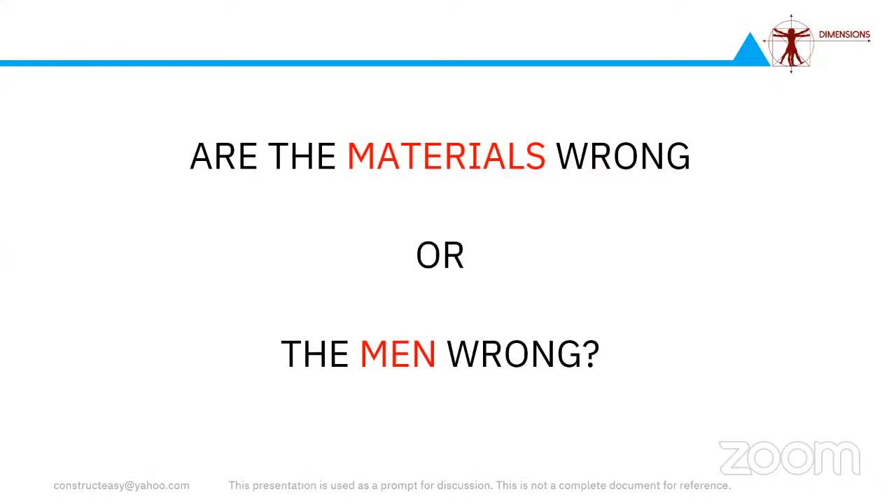But when you really ask, are the materials wrong or the men wrong? It is always the men, because you have put in the wrong material. It was our prerogative whether to choose that material or not. We were not careful enough in choosing the materials, or not vigilant enough in inspecting them, and that is probably why these defects came up. So our attitude should be providing solutions, not answers. Unfortunately, me included, most people in the industry start giving answers when confronted with a situation. Rather, we should all be focused on solutions.

Just to keep your moods high, because we are just after lunch, I thought I should share some answers I picked up from an answer sheet, and in some way we are also giving such excuses to our clients. For example, the answer sheet to your left: expand (a + b)^n. The guy started expanding it literally. There is some analogy with what we do on sites. I'm not pointing fingers, but everybody knows there is something wrong with the attitude of the industry itself.

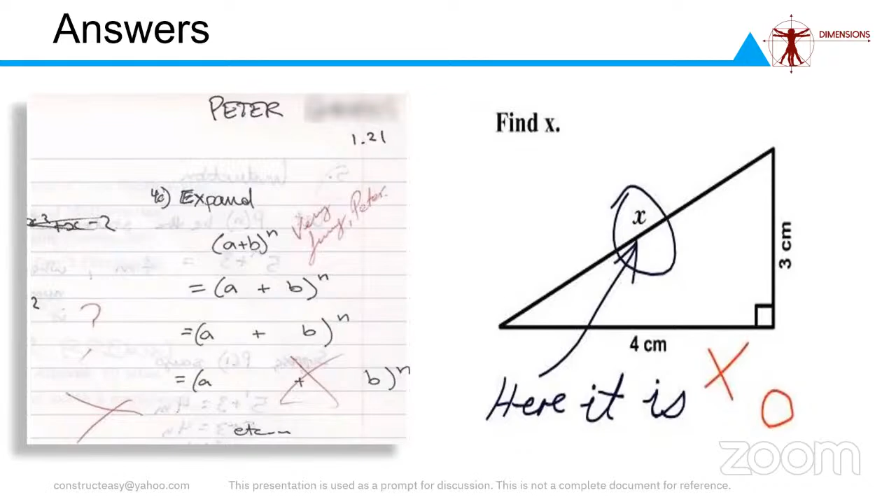So we only give what we know. We don't take an extra effort to customize the solution for the end user. So these are two examples. Maybe you can laugh looking at it, but yes, this sort of attitude is present. Either we are in that attitude, or sometimes in this attitude.

This is a newspaper cutting I took from a newspaper in Kerala. The rule book in Kerala once said that the pillion rider, the person sitting at the back, need not wear a helmet. But if you look at this picture, he has followed the rule, but not kept the spirit of the rule. And this is a very unfortunate attitude we have as constructors or designers. We go strictly by the rule book, without cognizance of the overall situation at the site.

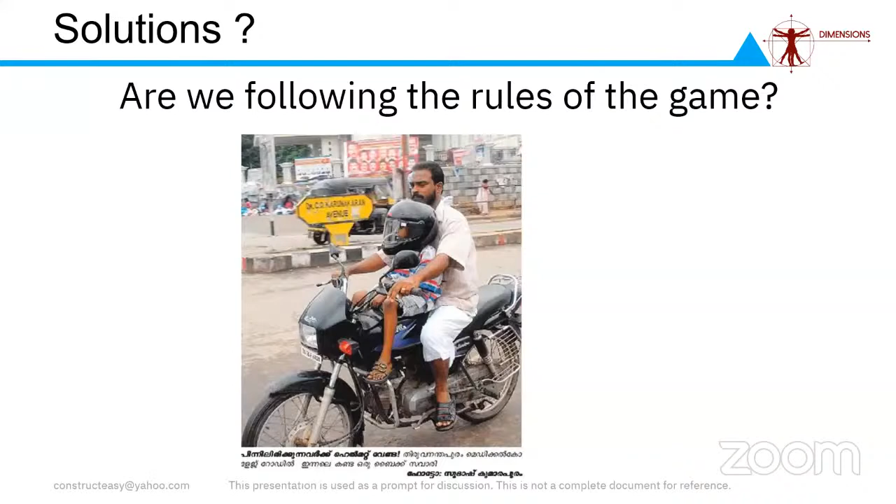We never relate it to the holistic situation at the site. So we tend to get too much into the rule and end up giving wrong results. These are generic examples, but I will slowly go into very specific examples of the construction process itself. I just want to set your thought process that yes, we have an attitude problem or a perspective problem. If we change that, a lot of defects can be avoided. So that was the moral of this story.

When we come to building materials, we commonly stumble upon sand, coarse aggregate, commonly known as metal here. There is also confusion here. Though we have technical terms for any material or process, the industry works on a very colloquial kind of language. Unless you know that colloquial language to communicate with the mason or the worker or labor level, you are not able to set the wheel in motion. This also should be changed according to me. We should all be more oriented towards the right vocabulary, even in specifying products.

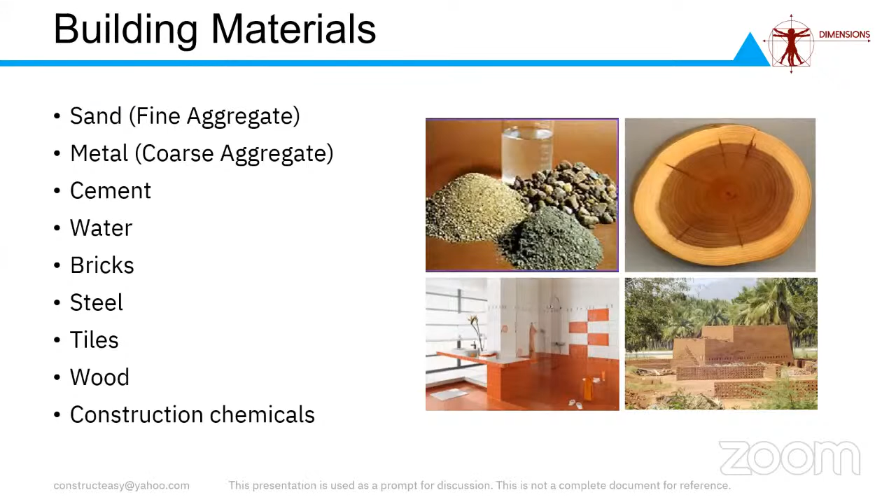So sand, coarse aggregate, cement, water, bricks, steel, tiles, wood, etc. All said and done, the basic construction materials fall into a list of not more than 10 to 15 items. We should know the specifications, the right kind of parameters for that particular construction item to be accepted. What I'm trying to underline is we should all be aware of the acceptance criteria for each building material we are going to use, and all these acceptance criteria are well defined in our codes, Indian codes.

We only have to sensitize ourselves to those values and start rejecting the non-compliant materials... only when we have a culture of rejecting non-compliant materials do we get the vendors sensitized to it, and they start giving us the right materials. As long as you keep accepting the defective materials, the vendors will also keep supplying you defective materials. I have at least experienced this in many of the sites where we execute.

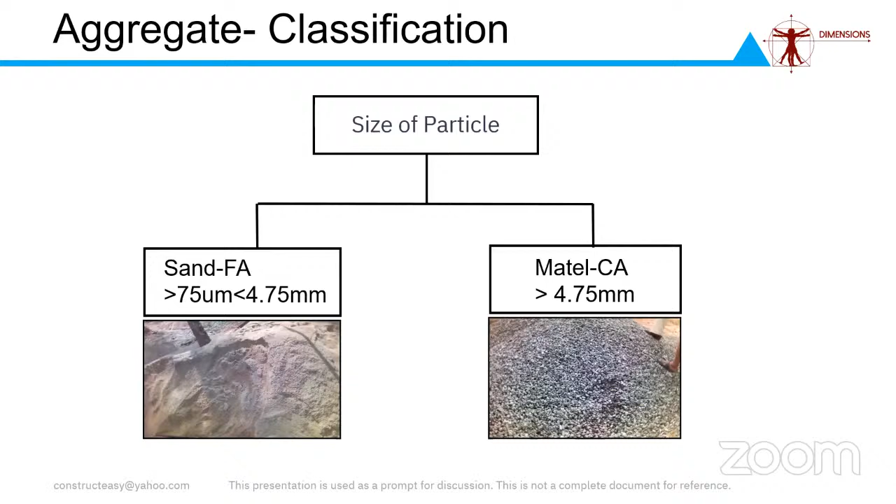For example, aggregates, if it is very flaky or elongated, we don't take that, we don't accept that. So once or twice, we reject the supplier, we reject the load, then the supplier comes in line and starts giving us very good quality material. So please be sensitized to it.

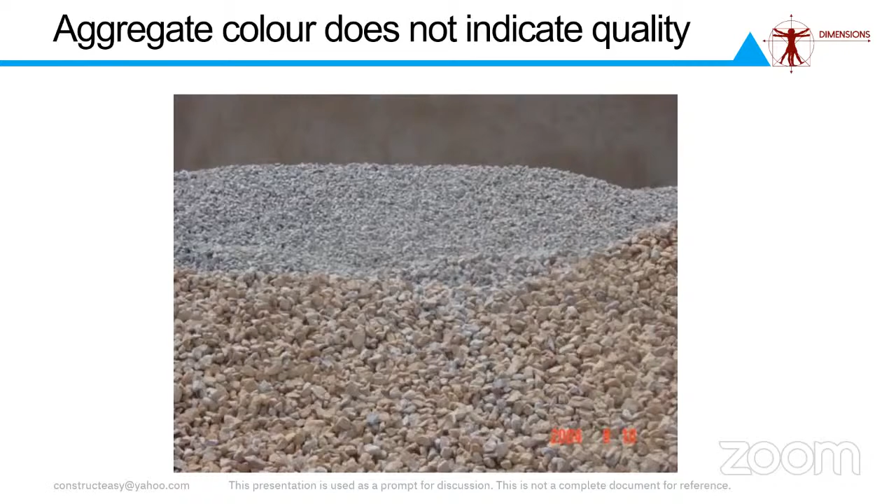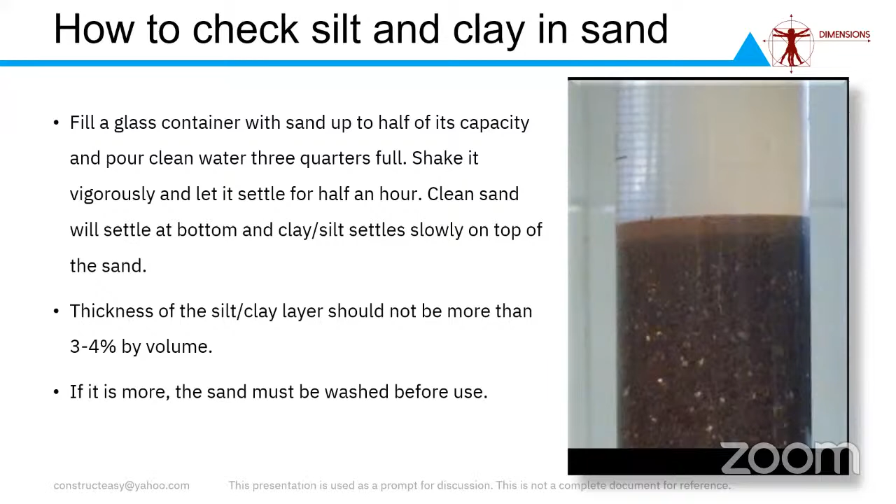I am skipping all these mundane items like how to check clay in sand, all these things. I have 2-3 PPTs to skip, I mean to switch. So I'm just skipping these mundane items, but nevertheless you should be sensitized that there are very simple tests available at the site. For example, to test clay in sand, you can just use a measuring jar or a PET bottle even at site to find out whether the sand supplied to you is silty or having excessive clay, whatever. So there are very simple techniques at site to find out the quality of the raw materials supplied to you.

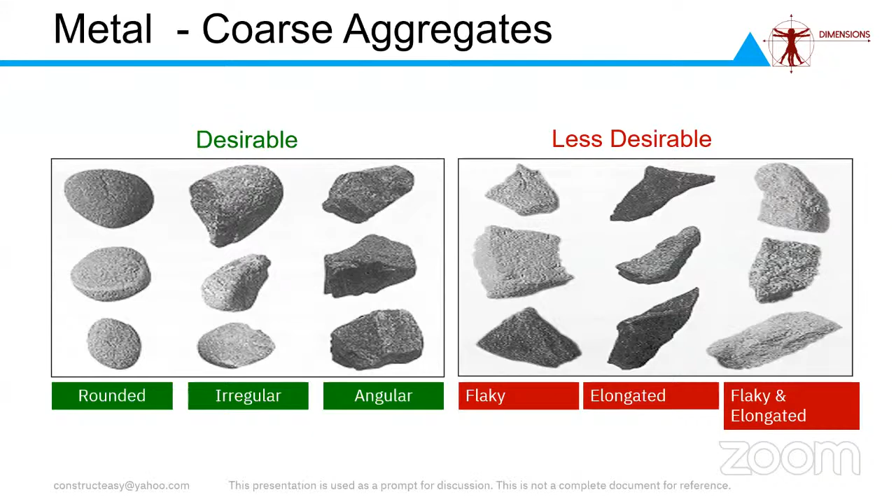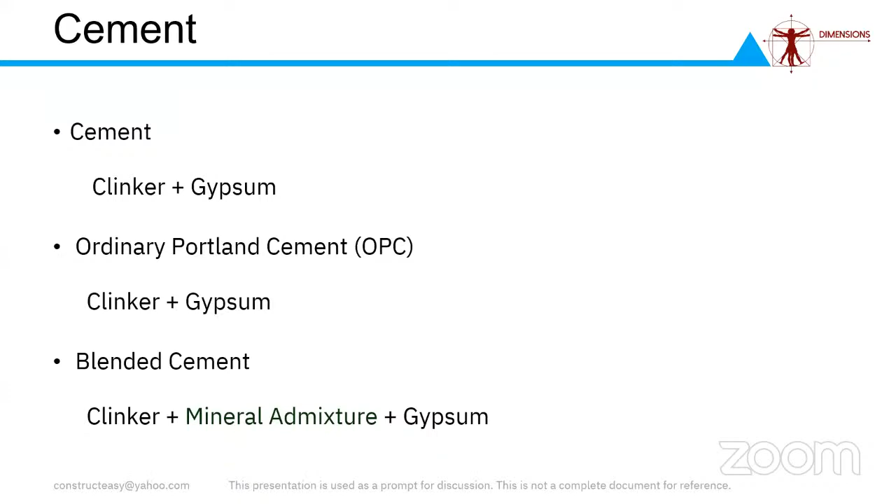So I will not elaborate on this too much because these are all mundane things which your textbooks have already given you, for sand, coarse aggregate, fine aggregate, cement, all this stuff. So I will straight away go to the defects.

Any one participant? Anyone? I'm just doing this to make sure that I am online with you because I am not seeing my face or anybody's face. I'm just glaring at this PPT only. Amrita? Bangalore. Amrita is there? Arpita? Abhilash? Please, don't take it as a viva voce kind of a situation. We are just discussing, and we are only going to spend the next 40-50 minutes very usefully for both of us. Yeah. Anyone come voluntarily?

No one is there, I think. Okay, so I'll keep the ball in motion, sir.

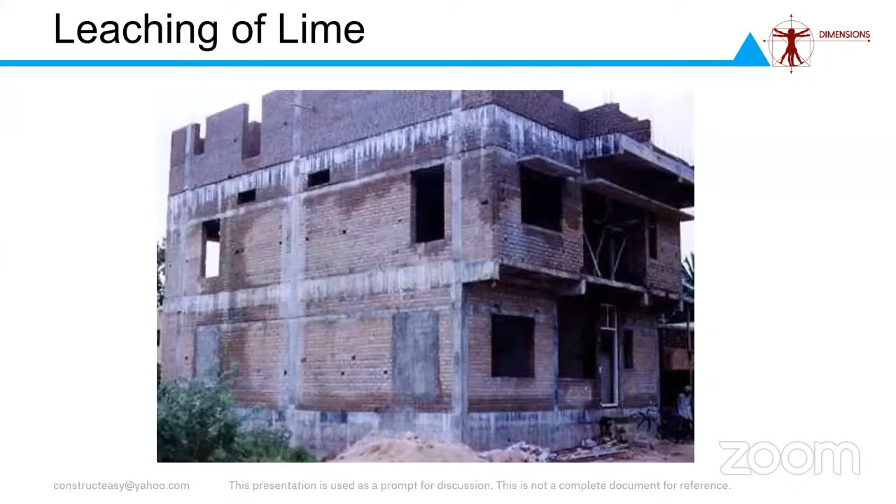Now these are pockets where moisture can attack and thereby accelerate the corrosion process of your steel. So it's a very common defect that is taken very lightly.

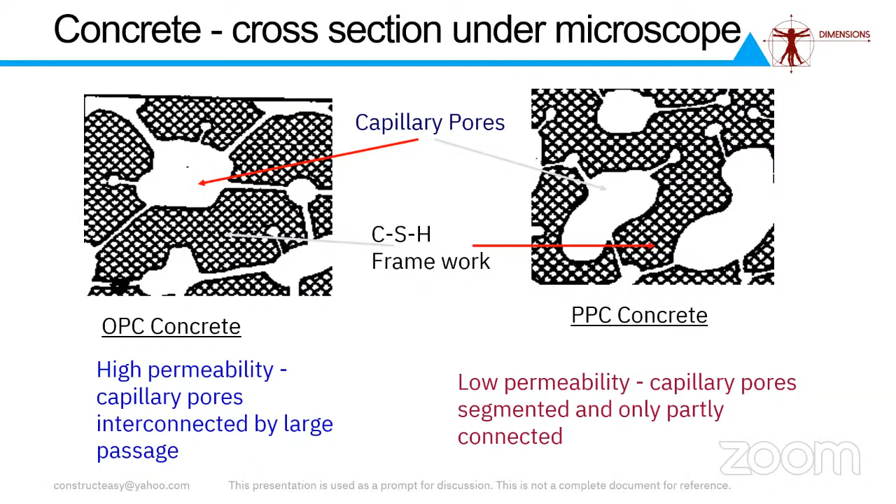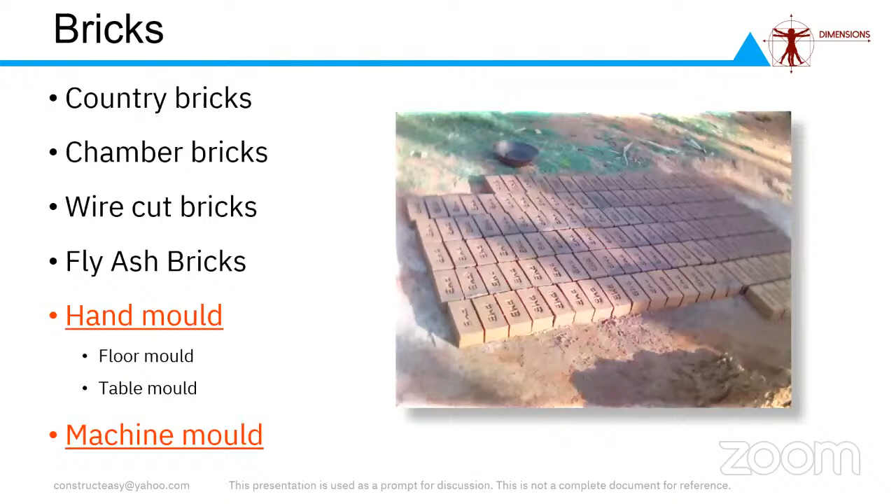I just told you these points of pore refinement, how cement chemistry can help you in controlling the leaching problem. So I'm skipping the mundane parts.

Now coming to very important defects in a building: a building is subject to a lot of external harassment, I would say, by the rising dampness from the floor, attack by nitrogen oxide, sulfur oxide, carbon dioxide, the pollutants in the atmosphere. The rain itself is classified as acid rain because of pollution levels in the atmosphere—whatever we get is more or less acidic rain only. So these are all external loads or attacking factors on a building, against which your building has to fight and still be defect free.

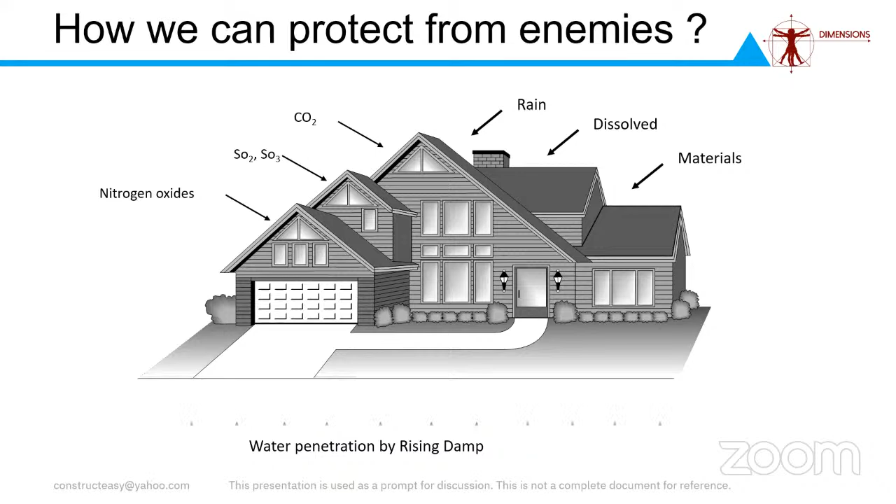There are other factors such as overloading, under design, wrong execution, wrong selection of building materials, which are all captured inherently in the building. Apart from these external factors, there are also internal factors which contribute to defects in a building. I'll show you this example.

This was a period when I was working for the cement company, as told in the introduction. I was working for ACC Cements, and I saw this pleasant sight of our cement being used at a site. I saw these bags with our company logo and all those things. I was so happy, so I entered the site and congratulated the owner.

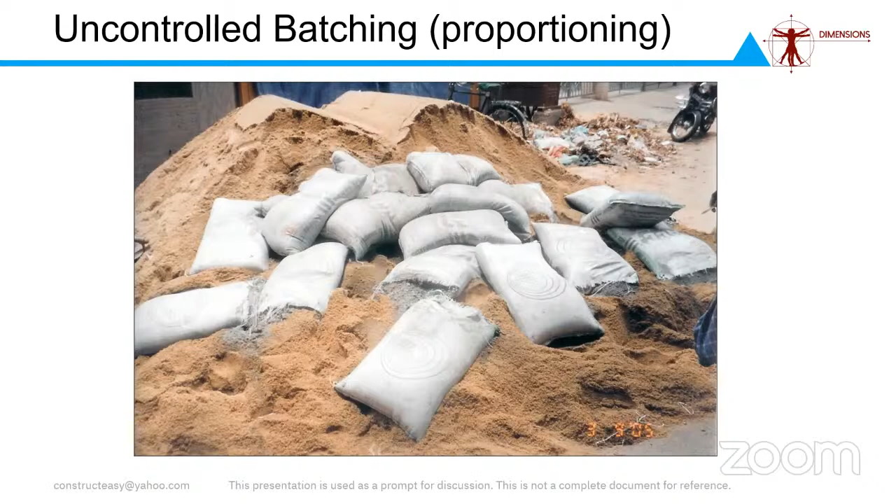But I found something shocking - they just tore a few bags, put it on a pile of sand, and started mixing it. They had aggregates separately. I think you'll be able to see it in the background. Are you able to see my cursor moving?

Yeah, so there were aggregates. They started mixing these aggregates with this mixture of sand and cement, and started concreting. I got shocked because the process of batching was completely ignored. When I questioned the contractor, he said, 'Sir, I know how much sand I have procured, and I am doing batching internally. I don't worry, overall the ratio is good.' But batching is not about ensuring the overall consumption of materials - batching is to be done for every cubic foot or every cc of the concrete you pour. So the uniformity of proportion is gone.

It was my duty to sensitize the owner that this is a very wrong construction practice. But unfortunately, this is a regional practice in many parts of South India - at least I've traveled extensively in South India than North India, but there are many pockets, many regions where this is the practice. There we still have primitive technologies to batch concrete, but this should be avoided. We should at least use a farma box, or volume batching by pans. That itself is wrong, but still in an advanced era of ready-mix concrete, we are still in the primitive stage of allowing site mix concrete without a process of batching.

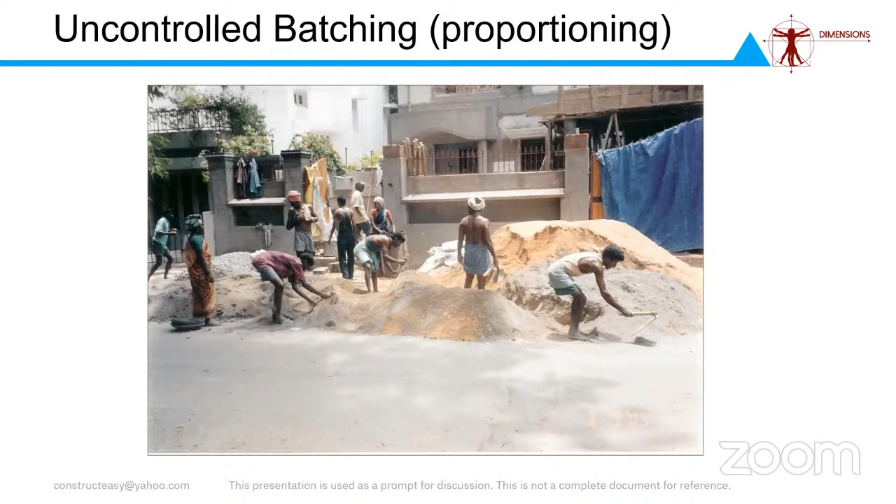Then I went upstairs, and to my shock, I saw something in a pan. I think you can also see this clay mixed with water kept on the roof. I asked, 'What is this for?' They said wherever we are providing joints for the electrical conduits, we put a lump of soil on top of it, and wherever we are providing hooks for the fans or the swings, we put a lump of this clay on the shuttering sheet, and then pour concrete on top of it.

I remember on one side we were advocating - if you remember your school days or college days when you studied construction materials - one cardinal rule of sand: it should be well graded and free from clay. Having defined that as a very cardinal principle of selection of fine aggregate, we ourselves have allowed this habit of introducing clay inside the concrete. So these are some wrong practices which are still prevalent.

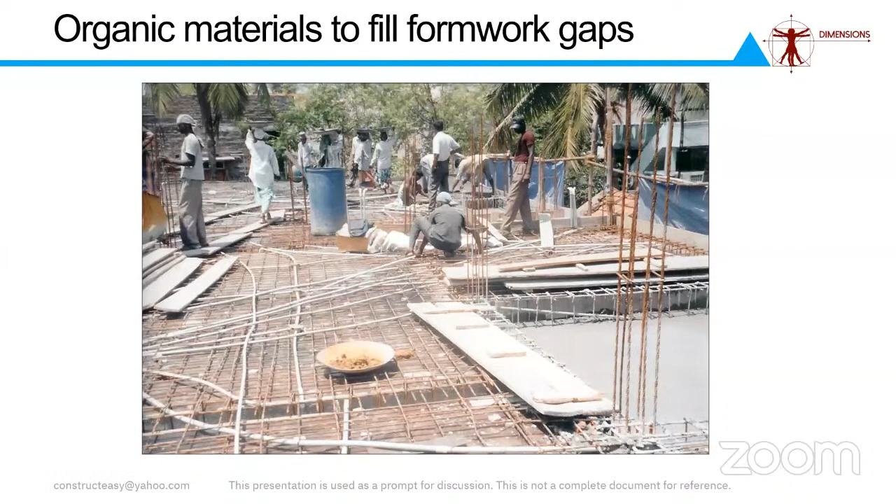And finally, we end up with dampness in concrete slabs and unpacked fan hook points. What happens after the formwork is removed? You still have the clay lump visible. We use a knife or a small steel rod to clean it up, and nobody cleans it with a jet of water or anything like that. So it is improperly cleaned and improperly sealed again with patching concrete. Now this clay which is inside will swell after a certain amount of time, and that concrete starts spalling or cracking. This is one famous photograph which I've shown to at least 200 of my fellow engineers practicing in and around my region.

Everybody said things are perfect - this is the kind of consistency you have to mix concrete. They are mixing, and sooner or later they will be leveling it. So I think this is the perfect way to concrete. In fact, colloquially, people told me - when I was migrating from the stage of a student to a site engineer, I remember my contractor telling me an analogy, saying that concrete should look like, or you should feel concrete like curd rice. That should be the consistency. He actually meant to say the cohesiveness of the concrete.

But all those are fine. Many people fail to notice this bleeding water. If you can see the footprint - I think Krishnamurthy sir is also watching this picture, he will be annoyed seeing people working with slippers, the safety boots are not there. But leaving that topic aside and concentrating on the material, the point where I am circling now with my cursor, you can see a footprint here, and you see a lot of free water here.

This is bleeding water, which is a clear indication that there is excessive water cement ratio in your concrete. So excessive water cement ratio means low strength and low durability. This is the basic Abraham's law. So this part nobody is sensitized to, and this is a major cause for defects. Defects like what? Defects like this.

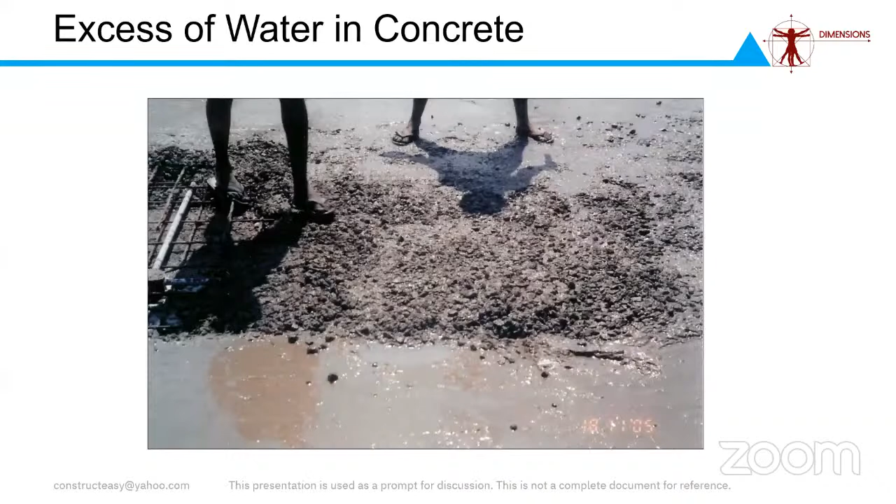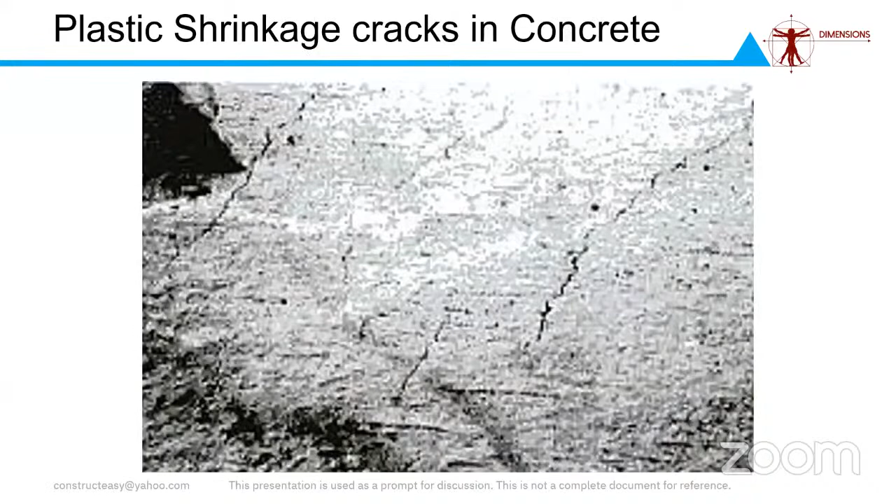The classic plastic shrinkage crack is either due to too much of fines in the concrete, or due to excessive water cement ratio. As a result, the water starts evaporating too quickly, and it results in the shrinkage cracks. So if you control the water cement ratio, you almost control the cracks. So that is the moral of the story.

If you can see here, even on this site, they are at least using a batching technique. But before the cement bag reaches the mixer machine, at least 2 to 3 kg of cement is lost. Now, where is the question of your mix design? Where is the question of minimum cement content being ensured in the designed mix? So these are some of the carelessness which we do in creating the real concrete.

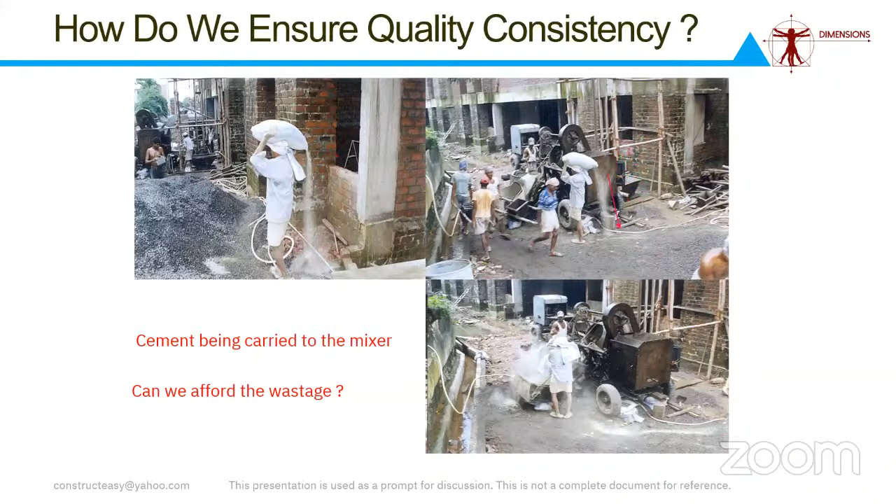On papers, everything looks good, but when it comes to actual execution, you can look at the coarse aggregate just haphazardly spread, and this will also be used for concreting along with the soil. So there is no proper storage system, no proper batching system. There are no proper check measures to find out whether your actual design has actually been executed.

This is poor site management, poor landscape management at the site, where rainwater, or in most of the cases in cities, we are forced to pour concrete along with sewage water also. Now these are all ignored or swept under the carpet. But when it later erupts as a problem, then nobody is there to pinpoint that these were the reasons for the defects, because everything is forgotten. Nobody has a record of what happened in the site when it was actually made, and therefore we are left clueless on how to treat the problem.

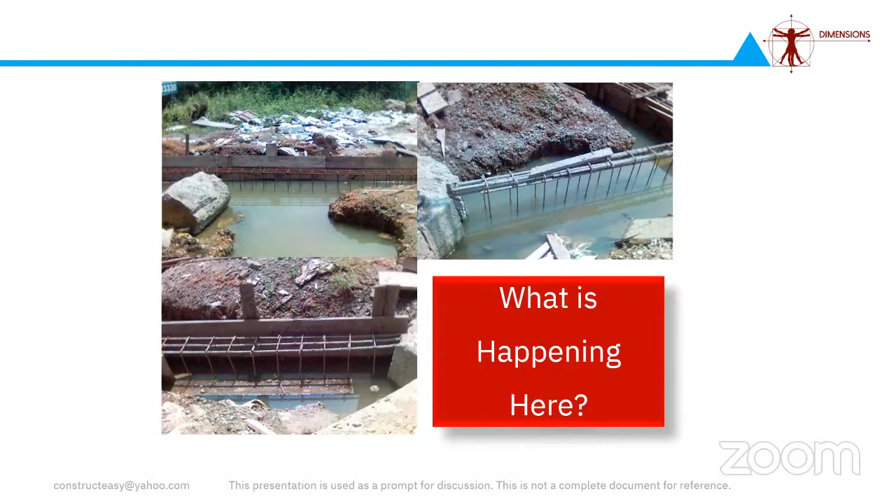So sometimes when it comes to a repair and rehabilitation project, when we go there, we find all the defects all right, but we never have a clue of how it could have happened. Maybe presently the source is not there, but when the construction was made, there was a pollutant or a source of this potential defect, which nobody noticed, and that is where we all fail.

So I would appeal to the engineers community that apart from the procedures what we teach in the design or in the quality control in production, we should also be having a checklist which clearly defines the prerequisite for each item of work which we are going to execute at site, or at least there should be a mechanism to record the scenario in which that particular item was made.

Now, this also is a very accepted phenomenon nowadays. Whenever you are doing a lath work or a ferrocement work, by not providing enough cover or a proper cover for the reinforcement, the steel reinforcement starts corroding, and you are getting all sorts of these unsightly pictures and the cracks. That is one reason. The cover thickness for the reinforcement is very conveniently ignored. People use very cheap cover blocks, not properly dimensioned. Many places they still use coarse aggregates as cover blocks. This is one reason.

On the other side, people don't understand corrosion very holistically. People have confusion with the normal rusting which happens. The steel, once you procure it, comes in a steel gray color, but when you leave it at site for 3-4 days, it turns into an orangey or brownish color. It is due to the oxidation of the steel. It forms ferrous oxide and it forms a coating on the surface. This is not bad. You can just clean it and still use it. But corrosion is different. This is not an oxidation reaction. Corrosion is an electrochemical reaction.

So when the same member, the steel, is subject to two different environments, like of different pH, one part becomes cathodic, the other part becomes anodic. So this is the simulation of a typical electrolytic cell, where you have an anode, a cathode, and an electrolyte. This electrolyte is also simulated in a concrete system where the pore moisture acts as the electrolyte. You have one portion which is acting anodic and another portion which is acting cathodic. Why should this act as anodic and cathodic at different regions? It is either because it is embedded in a concrete with different pH.

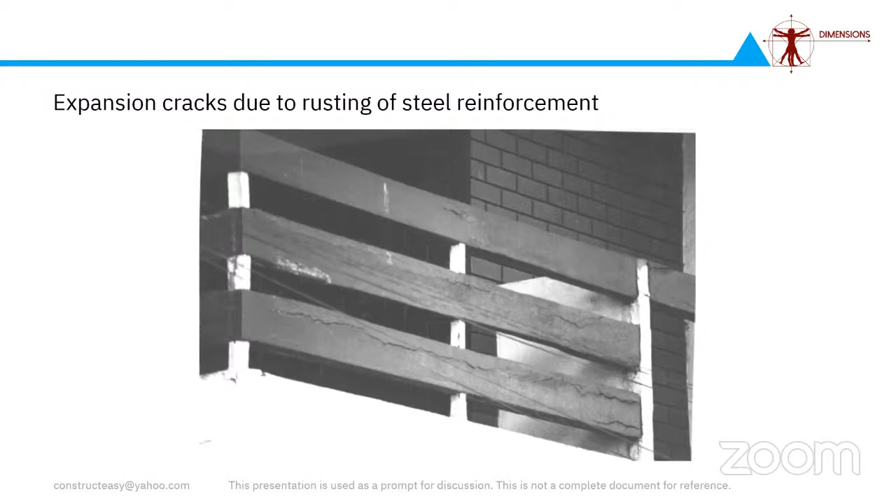It is not only okay to maintain the prismatic nature of the member, but it is also very important to maintain the material quality of the member also to be very uniform, because your steel is so sensitive to pH. So different pH in different regions will simulate an electrochemical reaction, and therefore the corrosion will become faster. This is one reason. The another reason is bimetal corrosion. If we start mixing two different grades of steel in the same system, then also this corrosion could happen.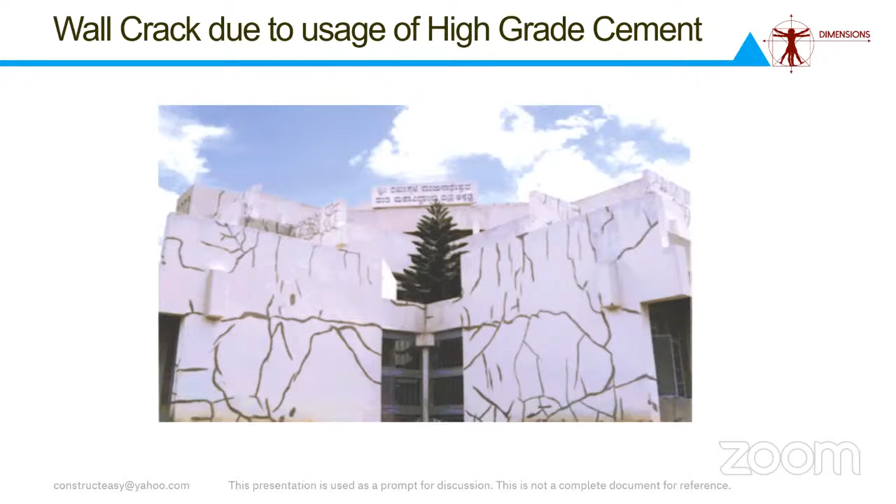So maybe as we do our master health checkup when we touch 40, we are sensitized enough in doing a master health checkup. Similarly, for buildings also, we should have some advisory which will recommend a master health checkup or a structural audit to maintain its stability and integrity. So we'll move to the next example. Now this is the same defect. This is one defect which again people have started accepting. This is called as a crazing crack.

Sometimes these are not even visible to the naked eye. Only once you pour some water on the surface will you understand this crazing crack. This is basically arising out of improper curing. People think that we have to cure concrete only the next day after the structure is done. It is wrong. You have to start curing as early as possible.

When I say this, I think you should also understand what curing is. Curing is not supplying water to the concrete. Curing is prevention of escape of water from the concrete. That is curing. Say, for example, you have a technology in which you can seal the entire surface. If you can laminate the entire concrete surface with a waxy layer or a plastic layer, then you need not do curing, because the curing is already done.

The water which you have added during the production of concrete itself is still there and it is not allowed to escape. So this water is available for the complete hydration of cement. But if you start allowing it to escape into the atmosphere, either by wind or by sunlight or by the external temperature or the humidity, then this crazing crack happens.

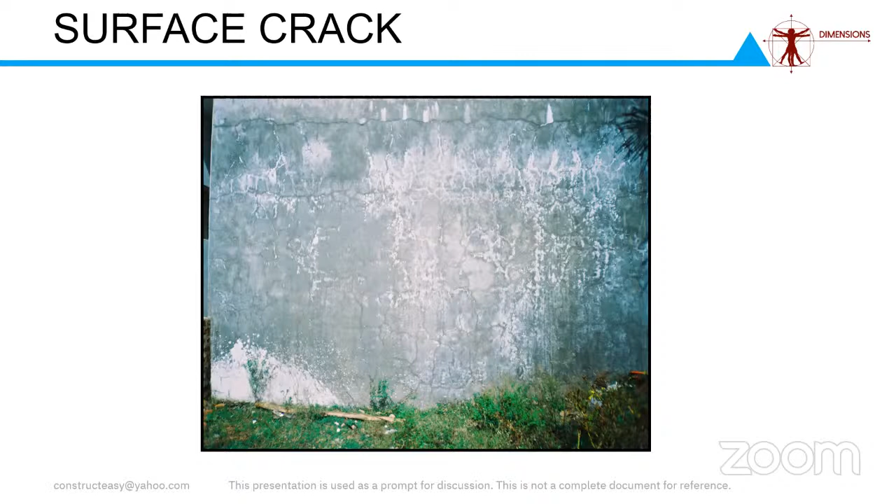This is probably why people are giving shades to the constructions. If you have noticed villas and small constructions around your area, they are covered with a cloth or a pandal, whatever you call it, to provide shading to the building so that there is no rapid evaporation of water. Curing is very effective. So early curing is the solution for the surface cracks, or the crazing cracks, as we would call them. This is another classic example.

99 out of 100 buildings done for housing units have this defect. This is because of improper cover. Either you give too much cover or you don't provide cover. There is an imbalance in the cover given, because if you start using aggregates instead of cover blocks, there is complete guarantee that all the aggregates will not be of the same size.

So somewhere it will be 18 mm, somewhere 25 mm, somewhere 16 mm, whereas the code recommends a 20 mm cover. So somewhere you have given a 10 mm cover, somewhere a 25 mm cover. There is an imbalance already. And smaller covers will spall off more easily, because once the steel starts to corrode, it tends to expand. When it dilates or expands, it will push out the cover concrete.

So in the first place, why should steel start corroding fast? It is because of the quality of water we have used during the concreting. People are not sensitized to this. We are forced to use whatever water is available at site. In many sites, especially in residential construction, we make the borewell first. We never get the water tested.

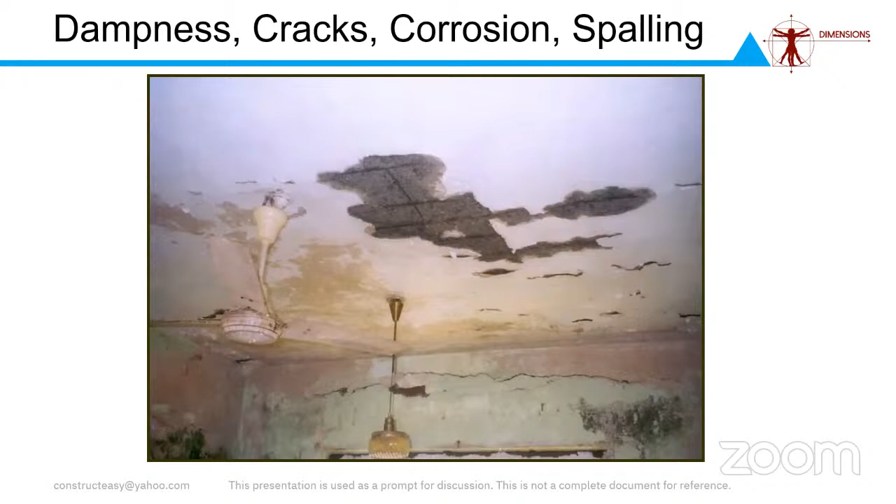This is also common, cracking in ferrocement, or the lath work, what you're calling. We have the reinforcement mesh inside this, and we just dab the concrete on top of it and finish it. Out of all the materials we use for construction, steel is the most sensitive to heat. It has, I think, the highest coefficient of thermal expansion. So what I'm trying to say is, steel tends to expand easily when heated.

And if you see, the lath work or the slabs are the elements which have the maximum steel in them. The distribution of steel is maximum either in the lath work or ferrocement work, or in the RCC slabs. And incidentally, these are the elements which receive maximum sunlight, or which are subject to maximum conductivity of heat. Therefore, the steel inside tends to move. If you don't provide enough protection to the steel in terms of the quality of concrete and the thickness of concrete around it, then it is more liable to cracking.

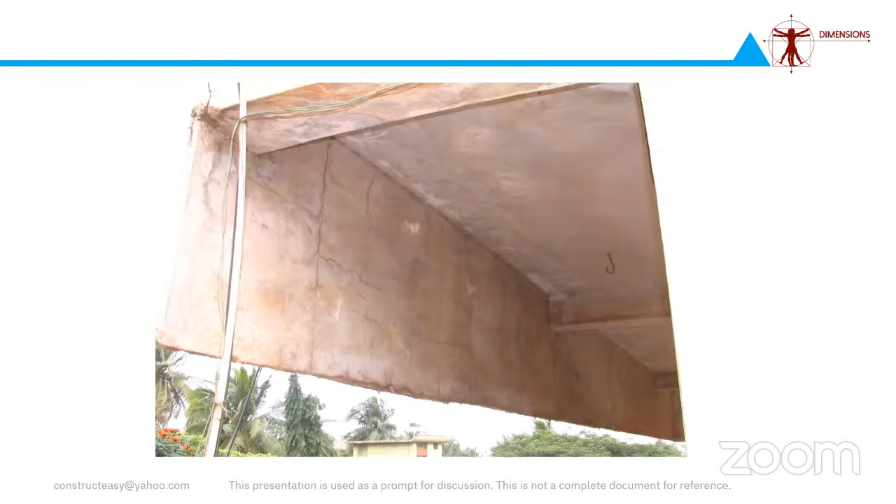So the solution for this is a proper design. Make the choice of the ideal or most optimized diameter for the steel, the quality of steel to be used, the water cement ratio of the concrete which will be used, and the thickness of the member itself.

One more example. Now this is another good example. You can see a horizontal crack here where my cursor is moving. This is probably the bottom of the roof slab. Many engineers who are sensitized to information like cover concrete use proper cover blocks. We have seen that, but even in those buildings, we observed these cracks.

If you go around your town and observe residential buildings which were done some 5 or 7 years back, in almost every building you can find the level of the roof slab, because that portion would have cracked. This is because we are not so sensitized about the side cover of the reinforcement provided for the slab. Bottom cover, everybody knows, we have the cover blocks in place, but side cover is taken for granted. The side cover is as important as the bottom cover itself. So if you take care of side cover, to a certain extent this can be avoided.

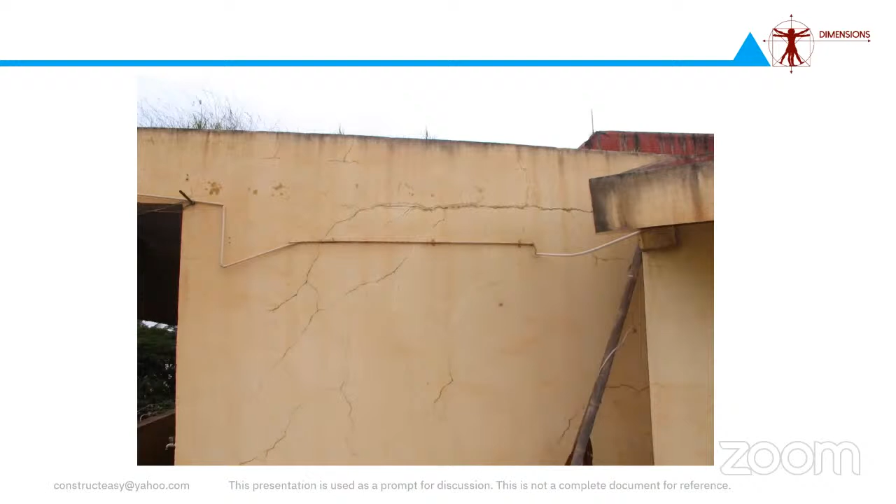And the other reason I told you: because the topmost slab will be exposed to maximum heat, steel will tend to expand, and this will try to push the slab out of the plumb line of the wall, and therefore this crack arises.

I saw one innovative practice in Kerala. If you can see this, almost all the buildings in the state of Kerala don't finish the roof slabs flush with the wall lines. They have a projection. If you can see, above the lintel they have given additional supports in order to protrude or cantilever the roof slabs outside the plumb of the wall. This is a very good practice.

This will avoid that horizontal crack, because whatever expansion happens in the slab happens at the free end, and therefore nobody notices a crack. If the slab needs to expand, it expands in the cantilever portion. If it has to contract, it contracts in the cantilever portion. If you remember your UG syllabus, you would have studied the plate problem, the Fourier series problem, the heat problem, where the expansion is maximum at the edges rather than the center of a plate. So that theory is valid here.

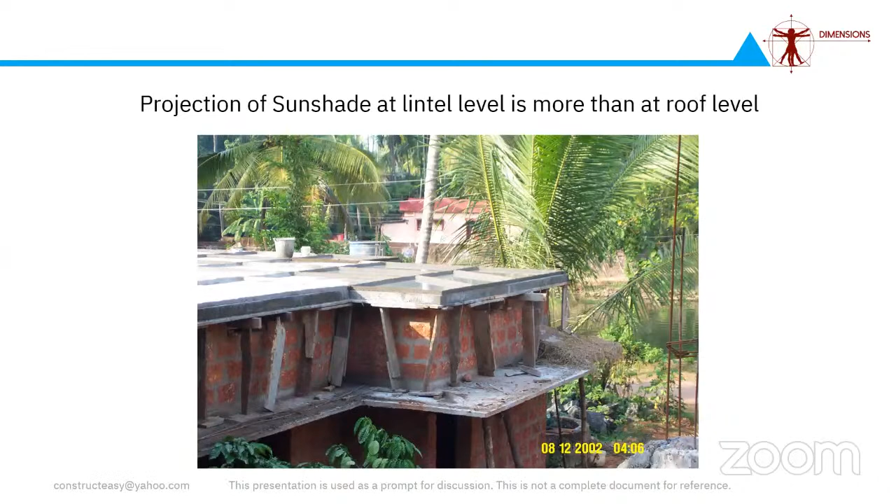That is probably why we had it in our syllabus, but unfortunately our mathematics professors did not sensitize that application to us. But this is the reason. Once it has to expand, it can expand in the cantilever portion. So this horizontal crack at the roof slab level can be easily avoided. I don't know by what means they were able to achieve it, but almost 99% of the buildings in Kerala are done in this fashion, and therefore they don't have this problem we are talking about.

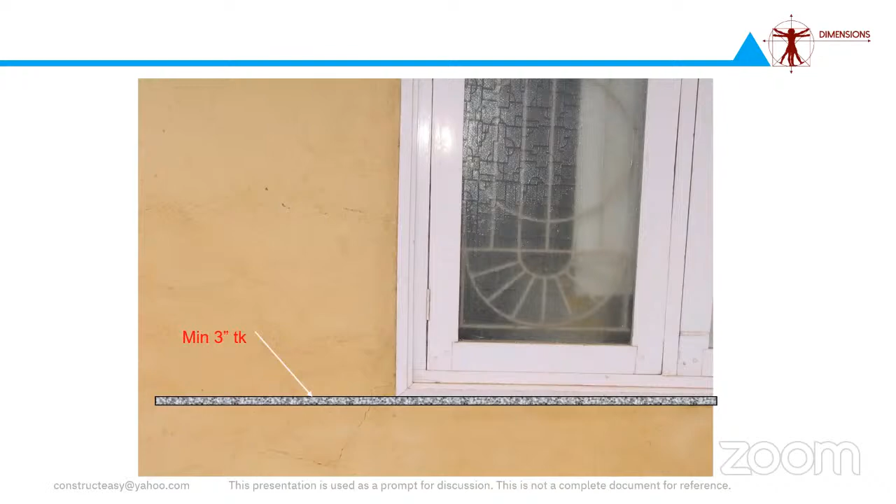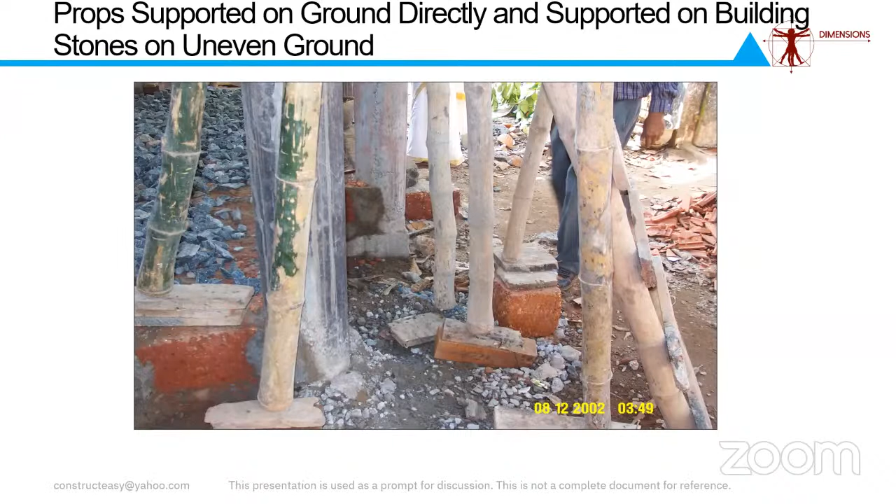And this will result in sinking of the formwork also, which may be to a tune of 2 to 3 mm or 4 to 5 mm, which you may not even realize. But this settlement of the formwork has already caused its problems inside the concrete. There is some gap created because you already have a mesh of reinforcement inside, so it will partially prevent the aggregates from sinking down along with the formwork. Therefore, there will be a void created, and this void is always a problem. Any civil engineer with common sense will be able to accept that.

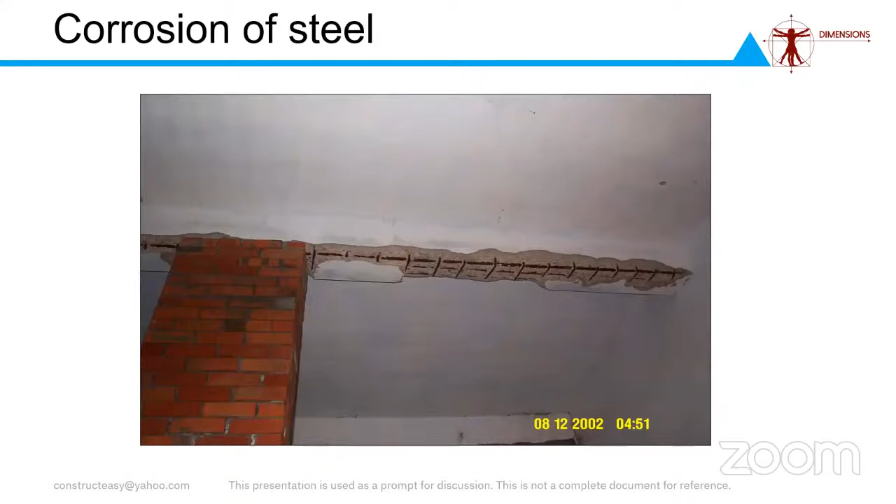And again, this is corrosion of steel, because you have been very careless in selecting the grade of steel, or you have been very careless in maintaining the uniformity of the quality of concrete along this member. So you will have anodic and cathodic areas, and the steel starts corroding faster.

Whenever you have different mediums butting each other, as an RCC column and a brick wall, we don't give enough thought to the coefficient of thermal expansion of both the materials. You don't give enough thought to the shrinkage characters of the materials, and therefore you are bound to get a crack at the junction. This can be avoided by using suitable adhesives which are available in the market now. This, to a certain extent, will withstand the tensile force which causes the cracks. You can also do the meshing around before you do the plaster.

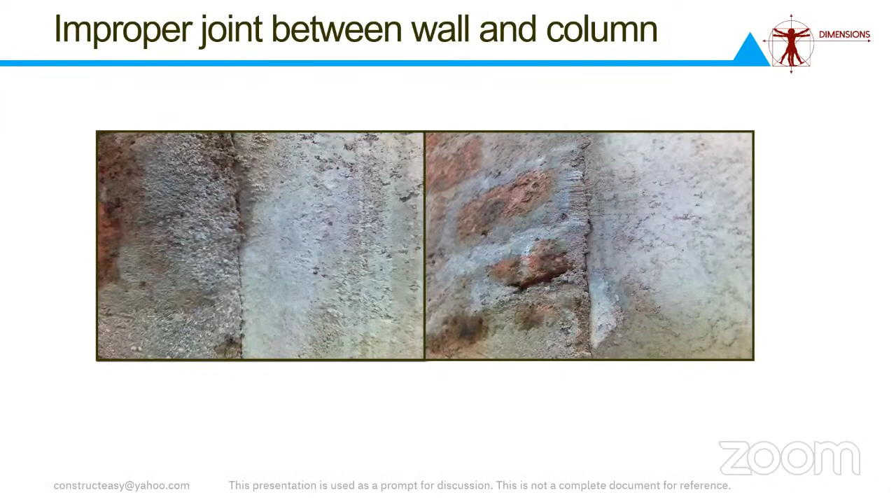But all these are not rocket science. These are all simple science basics of construction. So if you are able to choose the right kind of proportions for the mortar, which renders the non-shrinkable nature of the mortar itself, then your job is done. It will not crack. But if you are using a very high amount of cement, assuming that more cement gives you more strength, then you will get these cracks, because more cement also means more shrinkage. So proper assumption of the characters of the material is also of utmost importance.

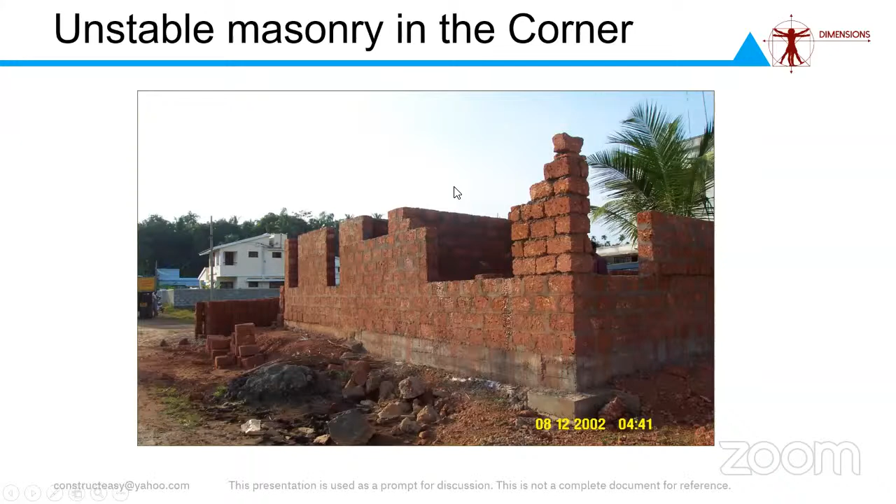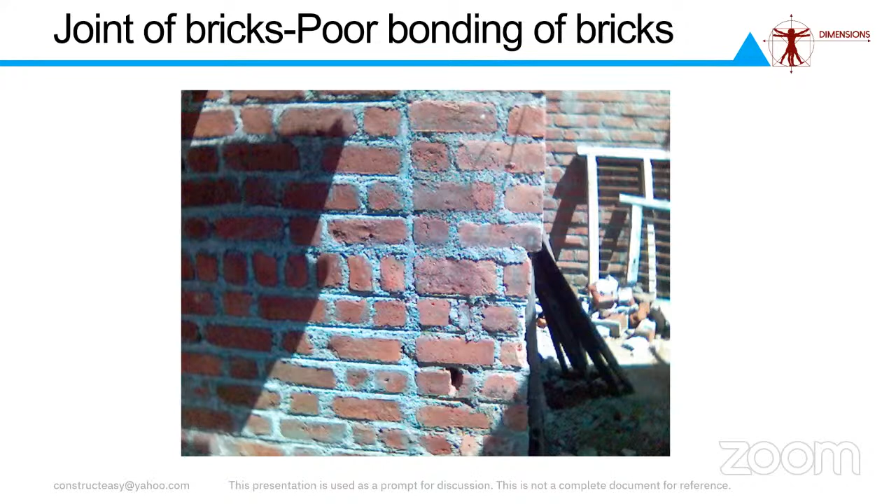Now again, bond. We studied various bonds in our college days: English bond, Flemish bond, all those things. But the principle of bonding is gone. You can see one nice vertical joint. So once you place the slab on top of it, after the load starts getting distributed, you will definitely get a crack here, and you will be forced to think that the material is wrong, rather than assuming what went wrong during the construction itself. So this is one typical case which happens in 50% of the sites we visit, and very unsound practices of making formwork for openings, lintels.

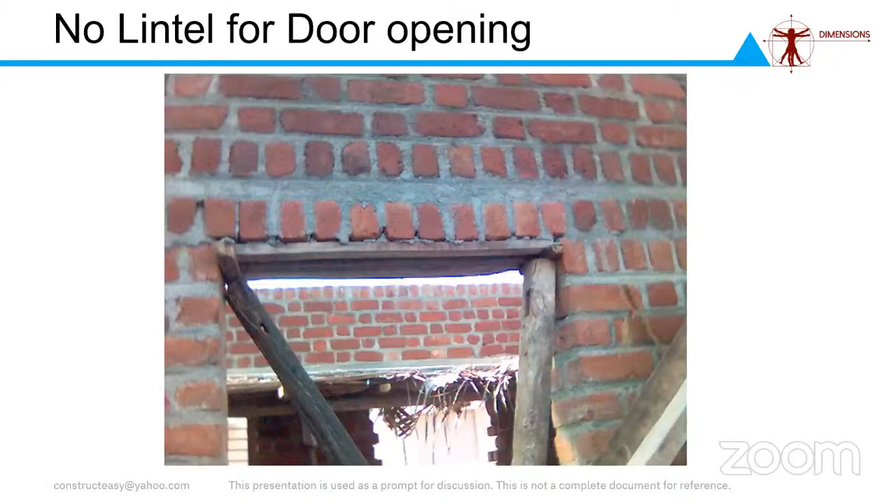In fact, these are some jugaad techniques which we use. Maybe these hold good in some temporary or low-cost construction, but for general construction, such practice should be avoided, because you have very clear-cut cases defined on when a lintel has to be designed. You might remember the 60-degree triangle you have to draw on top of openings. If it crosses the load transmitting member, the slab, the design is different. If it doesn't cross, the design is different. All those criteria are there, but they are conveniently neglected in most cases. I've observed that most buildings, at least in the residential sector, have almost standard lintel and sunshade designs. Nobody designs it—it's only copy paste, which is also wrong.

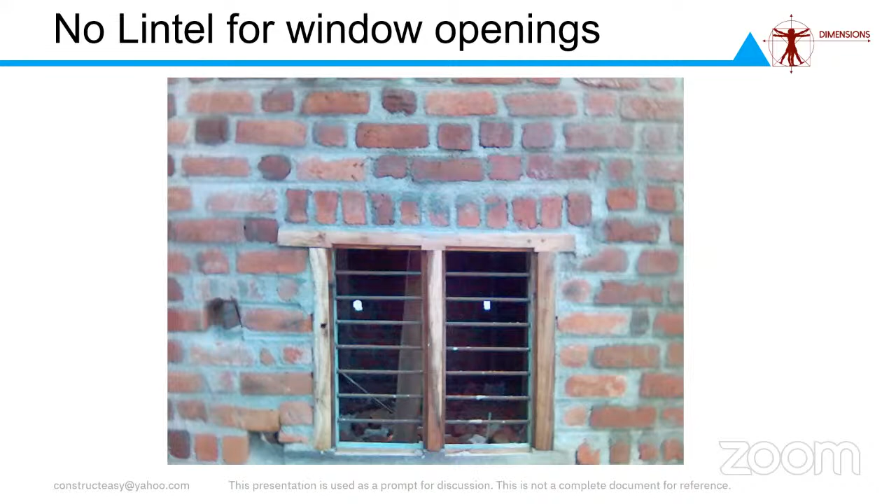The lintel itself has a design procedure. It depends on how much load the spandrel above the lintel is going to transmit—what kind of slab is above it, whether it's a two-way or one-way slab, what is its span, and how much load will get transmitted. All these things are to be considered before you even design the lintel. But you can go to any building and find all lintel sections are the same. We never question how it could be the same. Whether the load transmitted by all the walls is the same—it is not, because the spans of the slabs are different, the loading patterns are different, so the loading on the lintel has to be different, and therefore the design has to be different. But we don't do that. So these are some lethargic mistakes which we make.

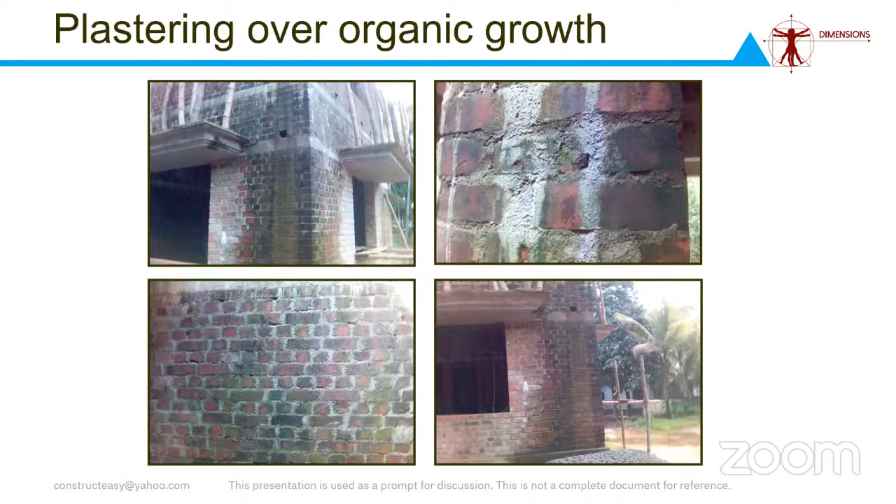This is another common mistake where somebody has overemphasized curing. We cure and cure, so that we form an algae moss layer on the walls, and it is not very effectively cleaned before the plastering is done. Therefore, we are bound to get cracks, spalling, or delamination of the plaster itself. These kinds of mistakes are also to be avoided.

If you look at the column here, there is some honeycombing. People will say, no, nothing to worry sir, we are anyhow going to plaster it. But will your plaster enter all these voids we are seeing here? No, plastering is only a superficial coating—you are locking a pocket of air inside, which can expand when temperature goes up, and can provide space for moisture whenever there's rain splashing or even when you cure, attracting moisture inside. This moisture stays inside, attacks your steel, and initiates the corrosion process. So all these kinds of defects should be avoided at the stage of making itself.

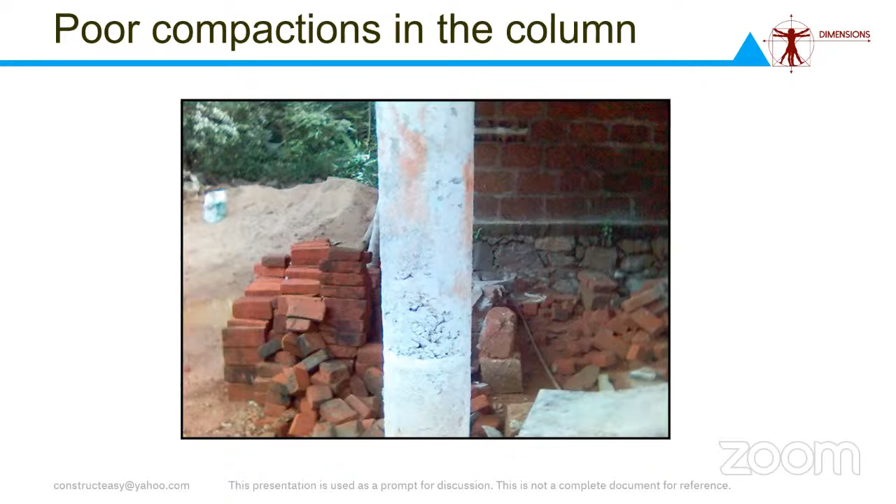Either your mix design should be so robust that even if you're a little careless about vibration, the surface should still be smooth—so the powder content of the mix should be very well defined and designed. Or if you've chosen a very normal mix, then you should ensure the construction practice is very good: use the right kind of vibrator, for the right amount of time, don't vibrate just superficially, use the proper formwork, and do proper oiling on the formwork. These are all basic rudiments which have to be followed, but they are not always presented to you as a checklist. As an execution engineer, it is your duty to ensure that each and every small step is religiously followed.

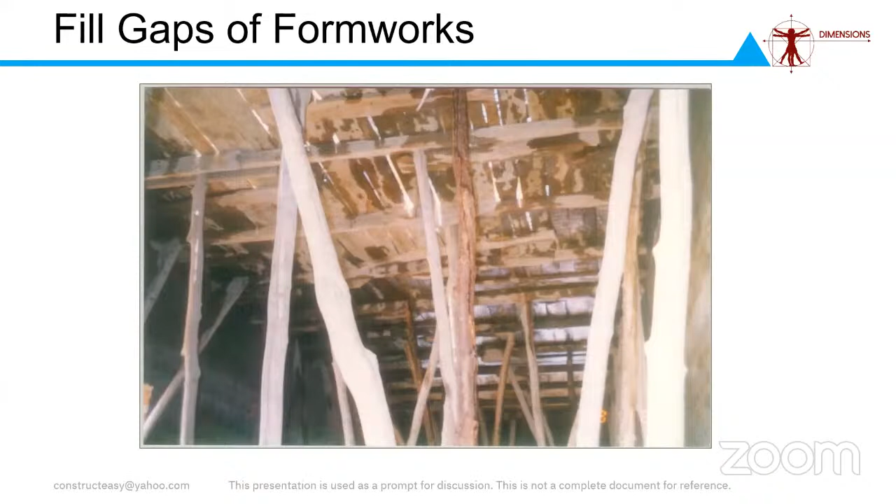This is a very common kind of formwork used for residential construction, at least in suburban areas. In urban areas, we've already resorted to steel sheets. But whenever you use timber formworks, these gaps are most often filled with organic materials—people use plantain leaves, clay, paper—all organic in nature, and the chemicals they release on contact with moisture will affect the performance of your concrete members. You can see in this picture some paper used to fill a gap in the formwork. Before plastering, this would not be removed effectively—it's carelessly pulled out, a portion of the paper gets stuck inside the concrete, and it gets plastered along with it.

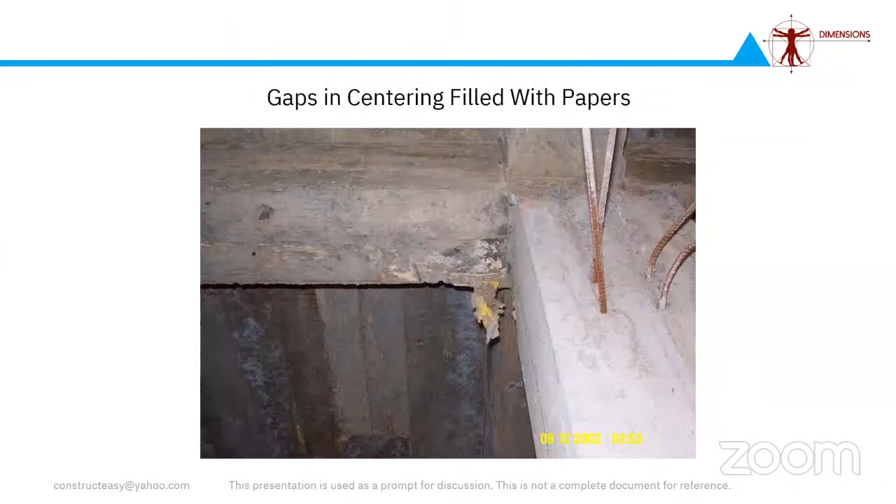This is probably a teacup which was used for filling the gap. There are portions of the reinforcement from columns or any element left exposed to the atmosphere. This is again an ideal situation for corrosion to set in, because the steel bar is partially inside a highly alkaline medium, concrete, and partially outside.

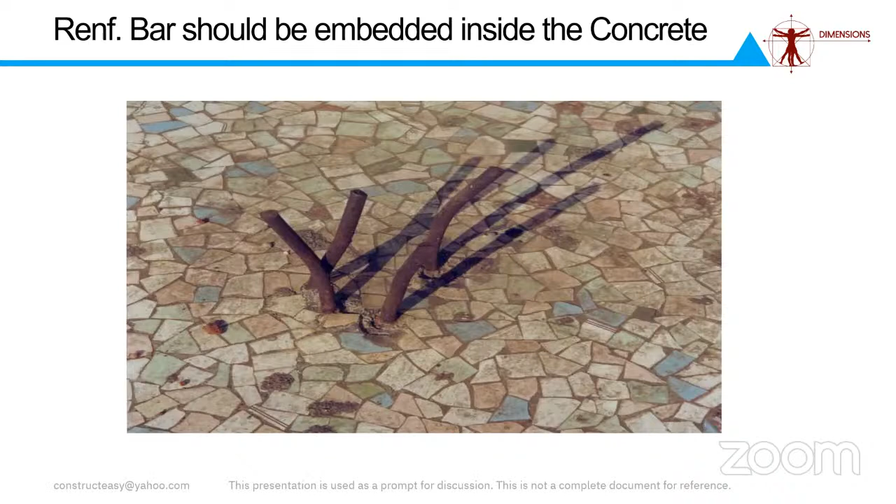It is exposed to the humidity, and therefore the corrosion starts very early. This is a mistake from the drawing desk, or from the desk of a stupid engineer like me. We only design the steel for the moment and shear force, and we are satisfied once the AST requirement is satisfied. No, we should also think of feasibility of concreting. If such a section is designed and executed, where is the gap for the concrete to fill in?

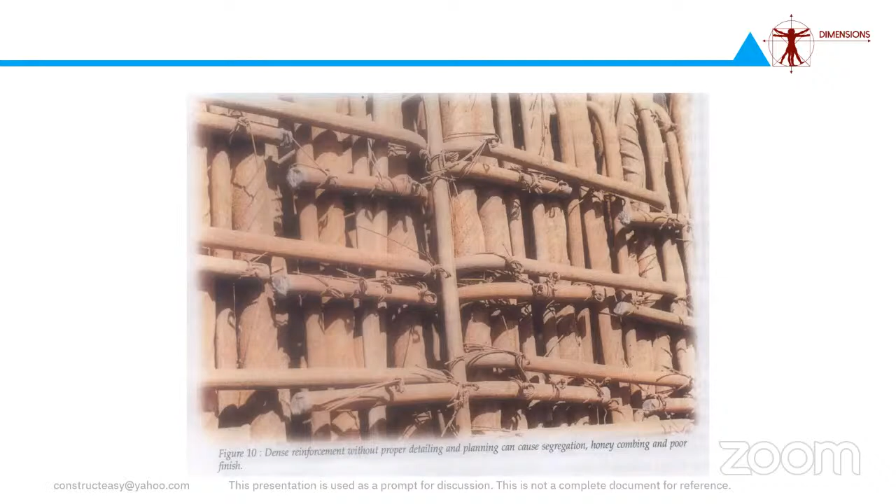So due thought process has to be given in terms of the execution of the design itself. Rather, I would have gone for bigger diameter bars, fewer in number, so that I ensure gaps between each longitudinal bar so that I can pour some concrete inside. If such kind of thoughtless designs are being executed, we are bound to get more and more defective buildings only.

So I would like to once again recap a few of the important defects. One is the major defect is cracks. Cracks can be avoided by choosing the right materials if it is not a structural crack. Structural cracks happen either because of poor design, overload, or poor estimation of the subsoil characters. If the soil starts to settle due to consolidation, or it could be an immediate settlement, then also the cracks will appear. That's a different topic altogether.

But what is there immediately in our hands to control? Yes, the construction practice is there, assuming that the design is good. If you assume that the design is good, or whenever the design is good, then the cracks or the defects appear only due to wrong materials or the construction practices.

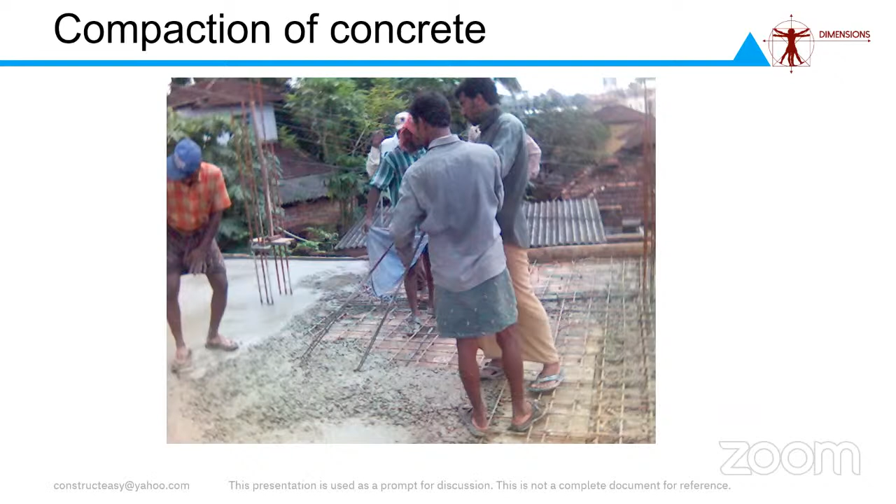See here they are using only a very thin rod to do the compaction. This is not a decades old technique, not even 1 decade old - it's at least 3-4 decades old. Now we are in the age of very effective vibrators. Handheld vibrators are available at a very cheap cost. Any builder or any house builder can afford to buy one vibrator for the entire house. It costs not more than 15 to 20,000 rupees. But that will ensure proper compaction, and therefore give you a very good, defect-free RC element. So compaction is one.

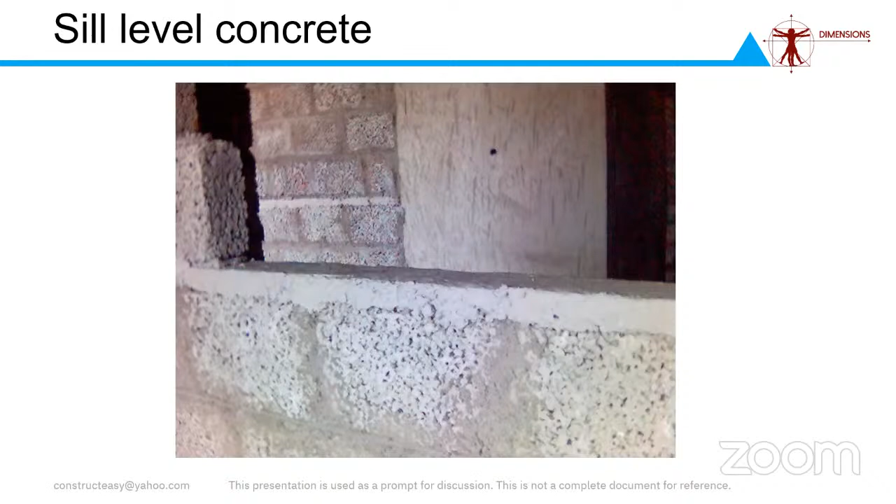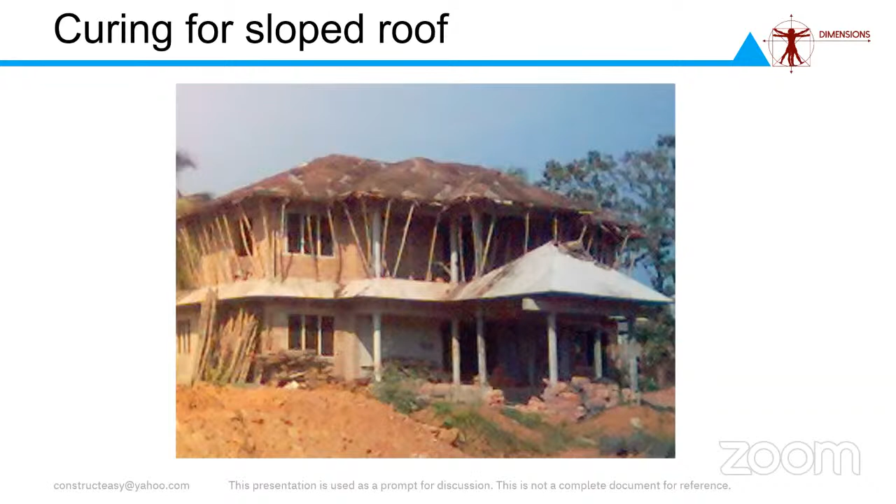Whenever you are mixing two different materials together, you will have to take care of the thermal expansion and shrinkage characters, and proper curing techniques. The time in which you start the curing is very important. I told you, if you do curing after the surface is dried out, it is as good as not curing the surface at all. So curing is not applying water to the concrete, but it is preventing the moisture from escaping out of the concrete.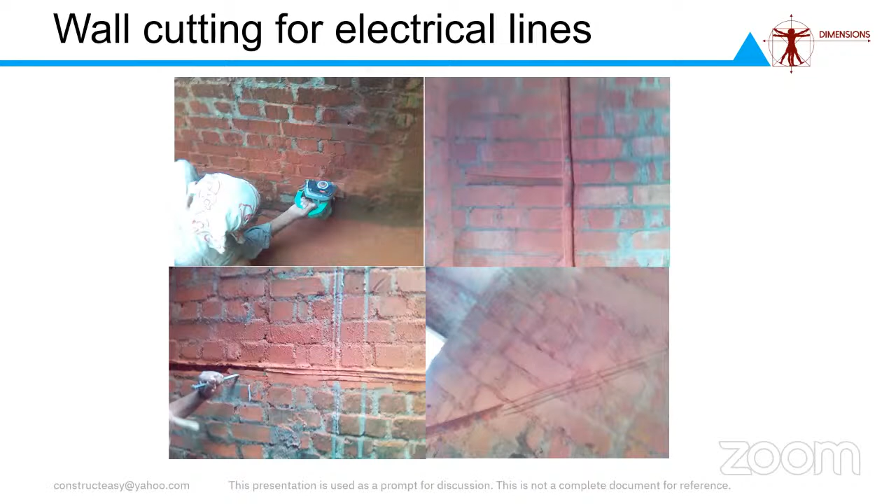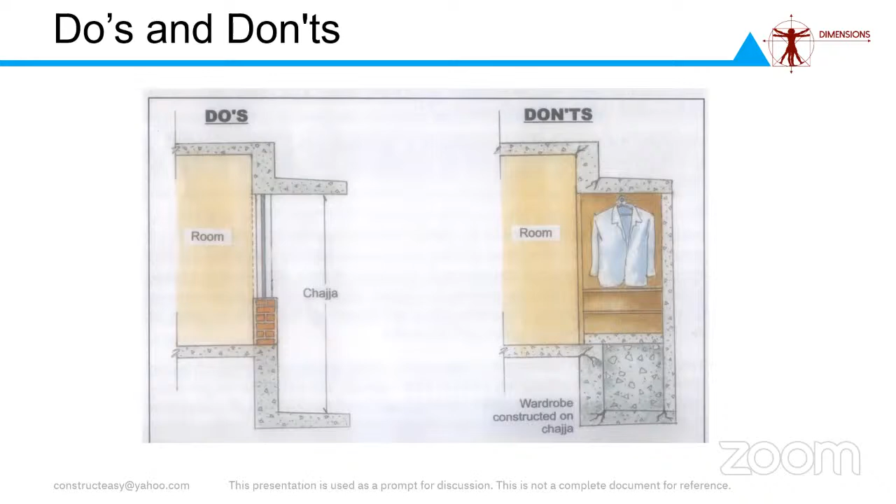We chisel out unwanted portion and thereby end up putting different materials. We put a very rich mortar in repacking it again, and rich mortars will shrink, and therefore we will get cracks in walls. Some common things we do, like if you have designed a chajja, we try to innovate. We make jugaad wardrobes out of it, but the sunshade would not have been designed for such a strong dead load. Therefore, it is subject to cracking.

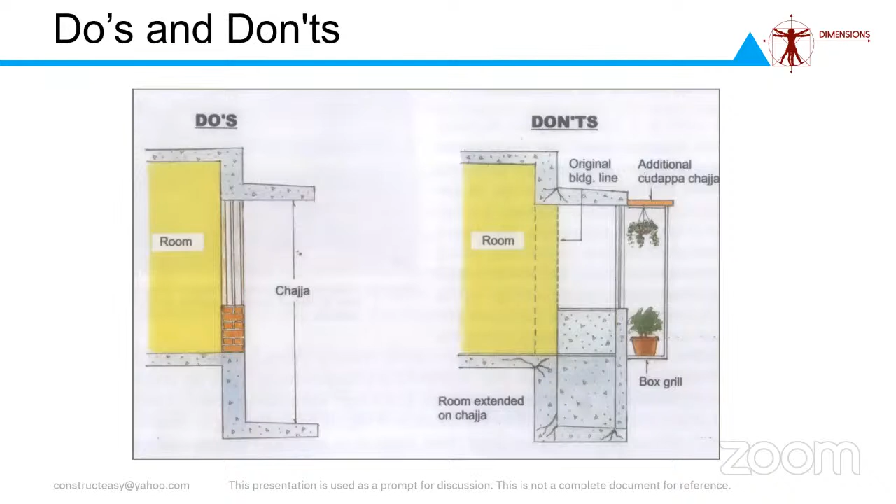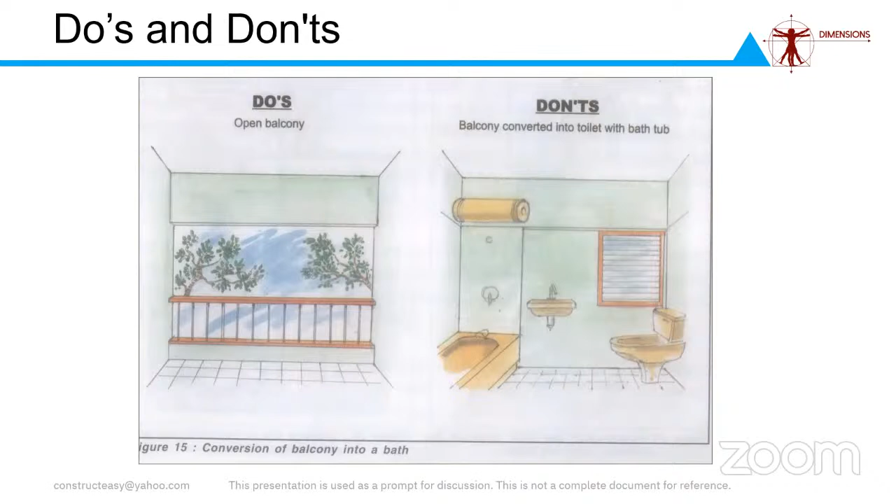So the change of utility also has to be very carefully done with the consultation of the designer. Again, converting a balcony into a toilet - toilets are designed with sufficient surcharge loads, the load of the filling material, all those things. But balconies are not designed so. If you're trying to convert a balcony into a toilet, then due consideration should be given to strengthening the slab, or at least checking the reinforcement provided for the slab and ensuring that it will carry the new loads.

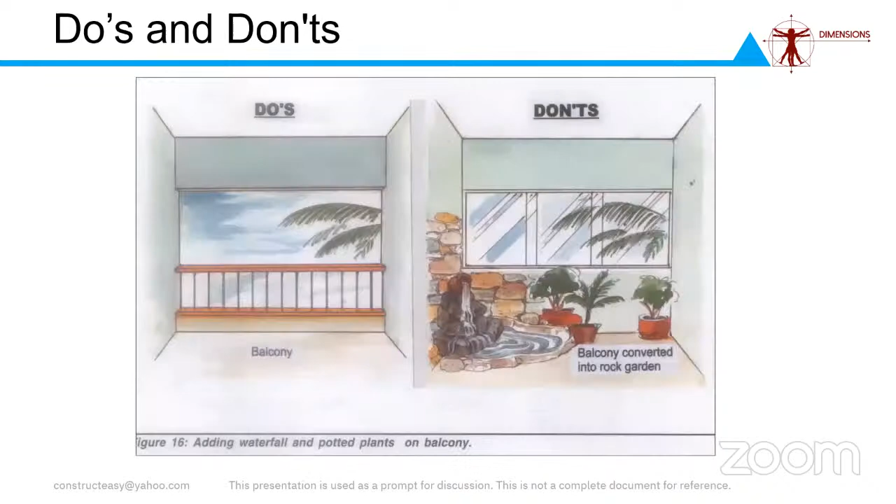So change of utility is one thing. Unplanned plumbing systems, like if you are converting an Indian type closet into a European type closet, the traps should be planned properly. You cannot just make a core cutting through a structural member and do it, but people do and still survive with it because probably the robustness of the structure is so good.

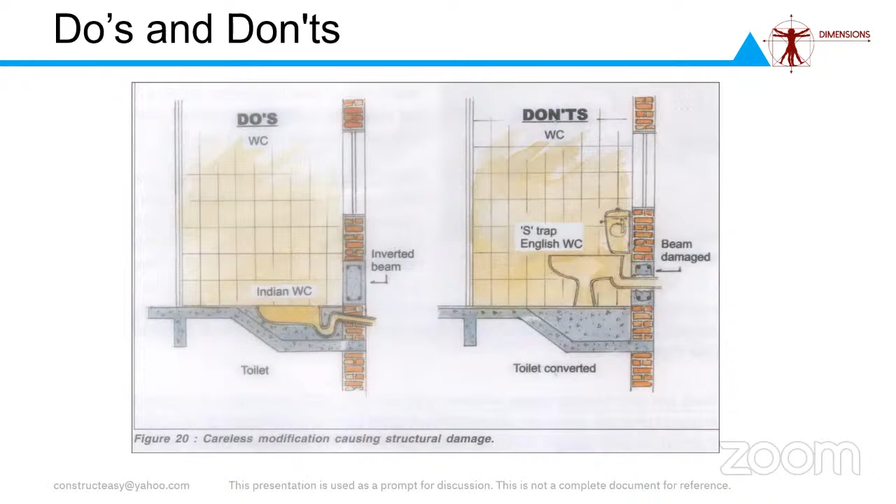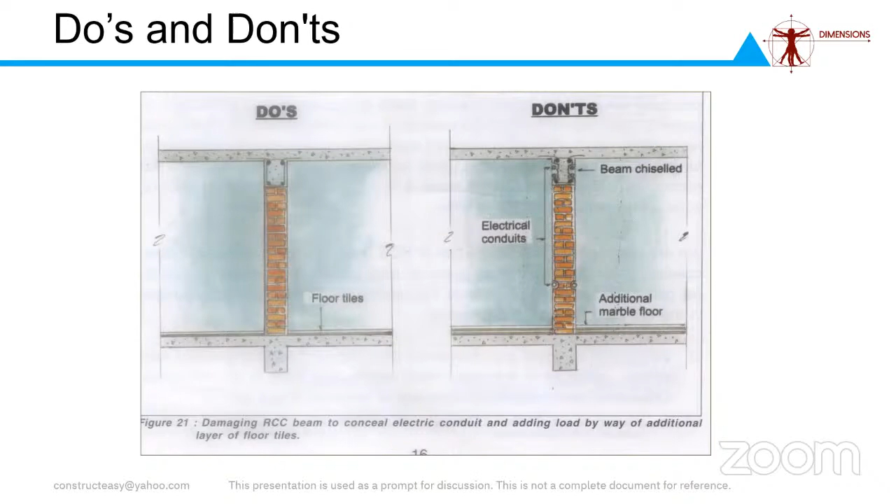But it will someday or the other start giving you headaches and problems - taking electrical conduits through chiseled beams. If you have not planned it properly during execution itself, you grade the beam and then chisel off the cover concrete to try to give the conduits. This is also going to attract problems because you have already eaten into the cover concrete.

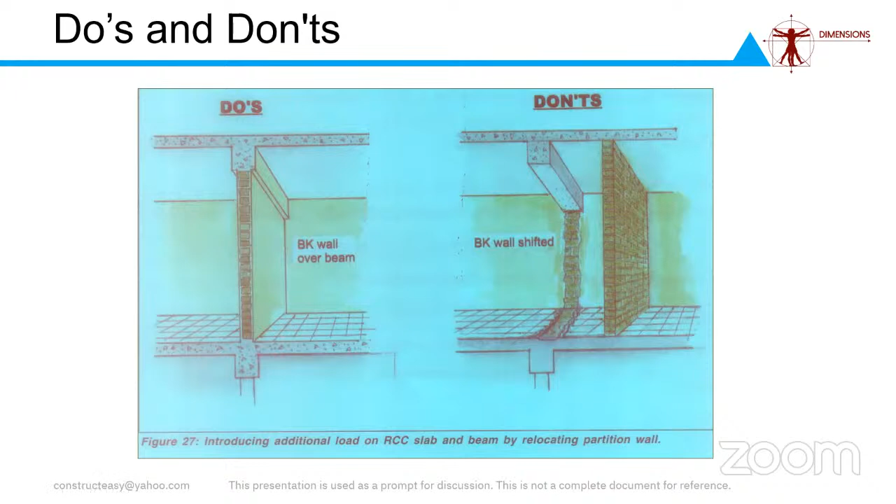So these are some fundamental mistakes people tend to do, and we as engineers also become party to it because of vastu considerations and functional considerations. If the slab is not designed for a line load, the beam would have been designed for the line load of the wall, but the slab need not be designed for this line load. But very confidently, we break open the wall and move it outside or create a new one on the slab. These are some wrong practices which we encourage, and I think we should put a big full stop for all such nonsense to happen.

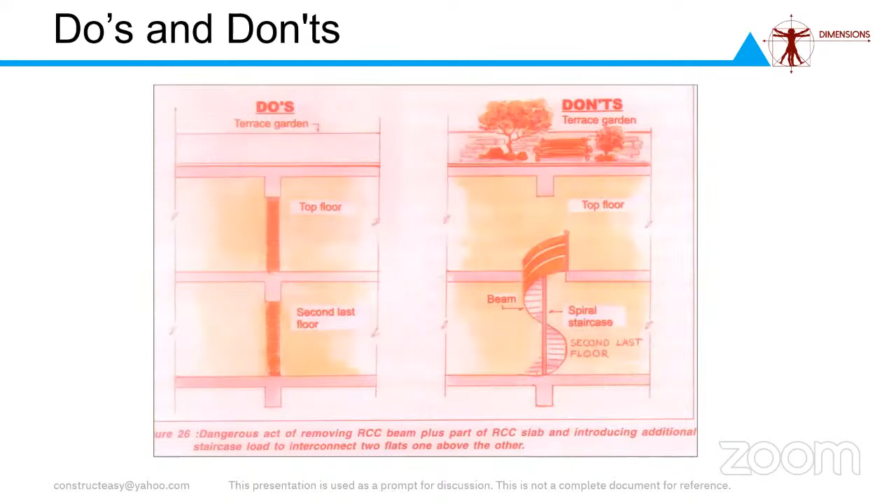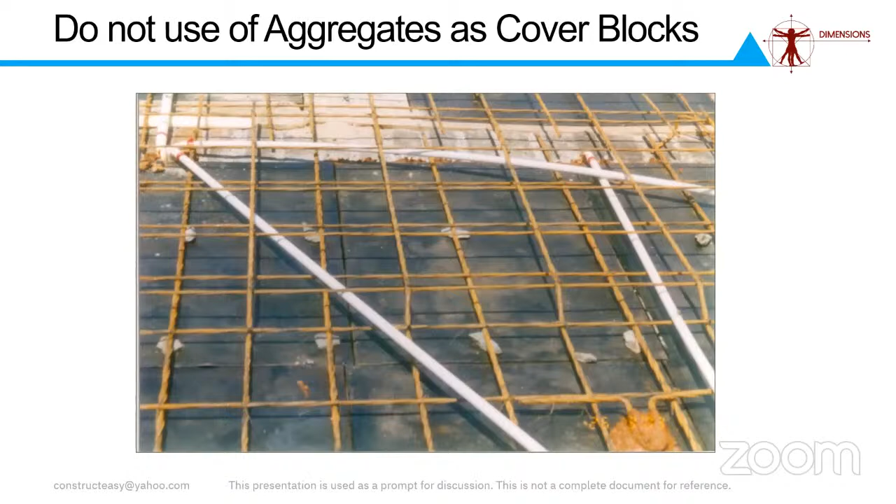So this is an example of the unscientific cover blocks used here. They have used aggregates itself as the cover blocks. You can see each aggregate is of different size, and you can see this clay being put on the fan hook that they have provided. There are very modern, ready-made hooks available with proper steel casing - you could have just avoided this. These are not very costly even; they are very much affordable for the common house builder. But still we resort to jugaad systems.

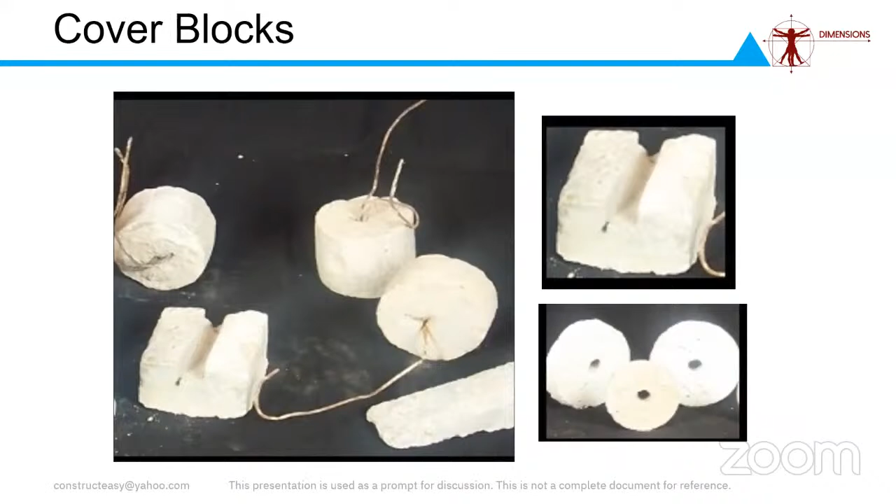So the cover block quality is also very important. People also resort to very cheap, non-engineered cover blocks, and therefore they will also attract problems.

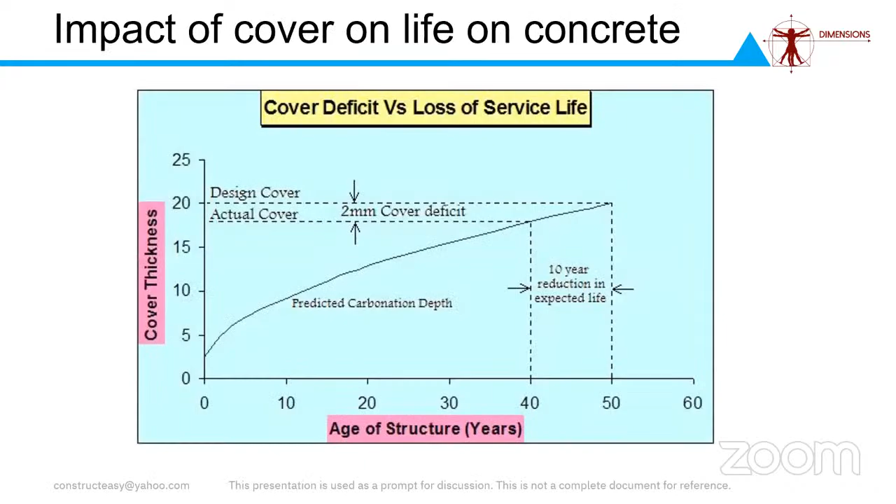So I think for the given time frame, I am closing with this. If at all you have questions, I can answer. I have two other PPTs on standby - I will open them as and when required, or if I have to give you an explanation.

Dr. Sudhahar has presented, based on his experience, the common mistakes we do at site. It has been observed by many engineers - all the engineers who participated today are from the district level, where the construction industry is unorganized and not going in a very systematic way. You can see all these problems, and now you can realize how these problems will affect the lifespan of the structure and quality of the buildings. We have to take care of all this, because there is no supervisor at many sites, and there are no quality reports generated from the sites either. Because of this, when there is no quality control, there is no person to check what quality of material we are receiving. You rightly mentioned, the selection of material is very important, and also construction techniques.

Many of the buildings Sudhahar has presented show a very sorry state of affairs. These things you can observe only in tier 3 or tier 4 places, because many tier 1 places are organized and MNC companies are there, with quality project management consultants. Therefore, I request all the Nirmiti Kendra engineers to take care, because the quality of construction is very important to improve the lifespan of the structure.

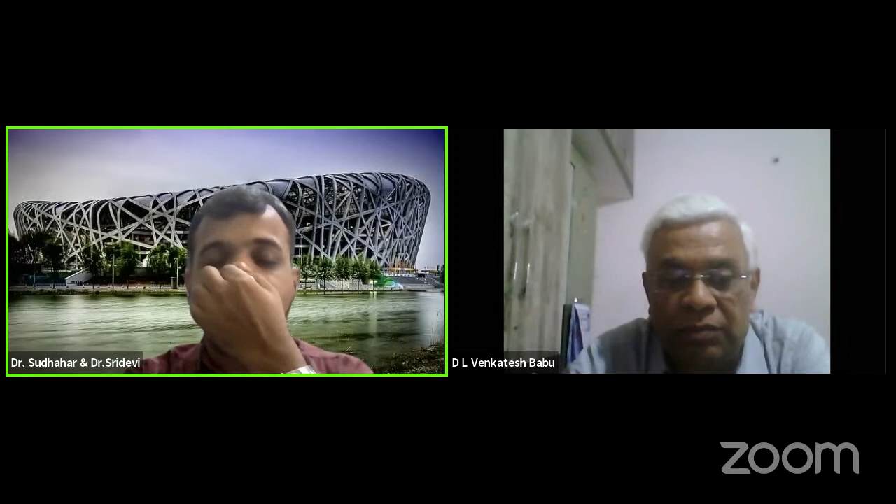Ideally, if you are going to do future construction, maybe after 3 or 4 months, if you can afford, you can make a dummy column. You can provide a brick column around the reinforcement. Keep it non-exposed. That is one way. People use a very low-grade concrete or a lean mixture of concrete, but that again is against the law. We just saw that if you expose reinforcement to a very alkaline medium and a less alkaline medium, corrosion will start.

So there are epoxy paints available which prevent the reinforcement from getting in contact with the moisture of the atmosphere. So you can put an epoxy paint. Or option 3, the least you can do is paint the reinforcement with a nice rich lime, because lime is very alkaline. But you have to inspect often, because due to weathering action, if the lime falls off, it gets exposed again. So provide a proper lime wash. That is the cheapest.

Next cheapest would be providing an epoxy paint. The third one will be to provide a dummy column itself, and then break it open when you are going to do the actual construction later. Okay, sir. Thank you, sir.